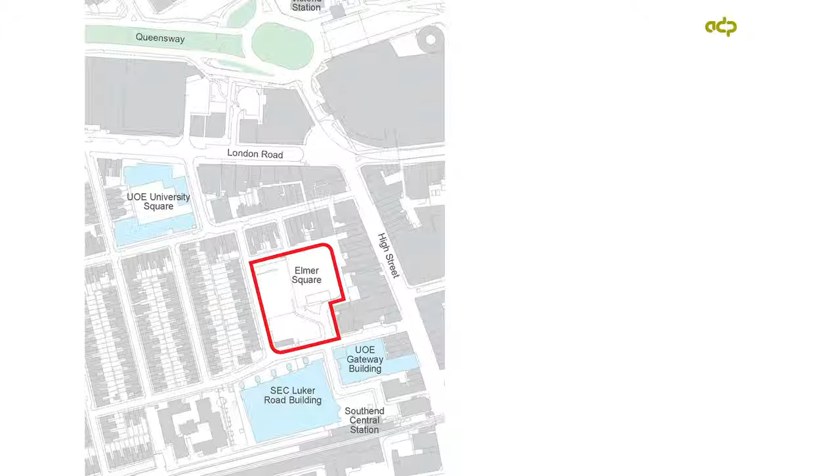So there's the site in a bit more detail. The Municipal Library is actually off the plan to the north, so that's roughly 5 or 10 minutes walk from the centre of Southend, so not ideal. The university, which is primarily located in Colchester, has accommodation with the Gateway building and also student study bedrooms, and the college has the Luker Road building, LSC funded big landmark building. So Elmer Square potentially is going to be the focal point of a new academic municipal area. Previously occupied by a multi-storey car park, which was pretty unsightly, so that was demolished to create the site.

So our involvement with the project began with an expression of interest through the OJEU notice procedure, and we were shortlisted with, I think, about 8 other architects to submit our more detailed design proposals and methodology. From the beginning, the way we've tackled the site is to try and put as much building to the western side of the site as possible, fronting onto Elmer Avenue, so that we're creating the sort of street scene and creating as much space as possible for public realm in front of the building. And to the right of the trees shown there, there's potential for future development which will further define that new urban space.

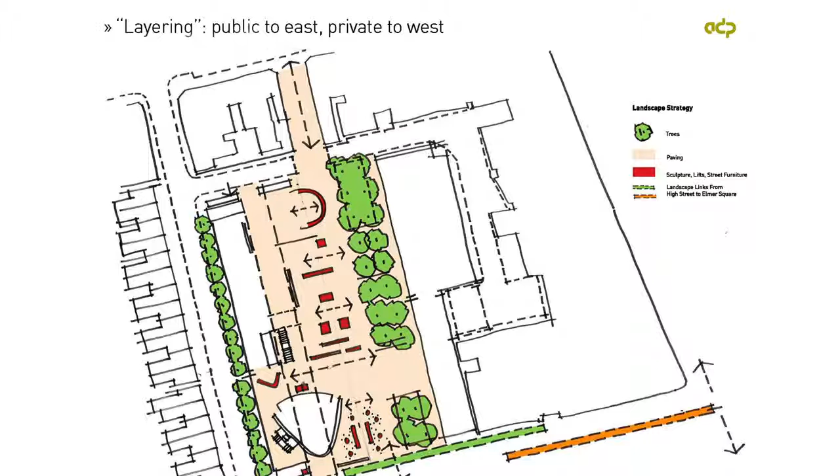And the way we approached the accommodation was to in effect layer the facilities so that the more private accommodation would be on the Elmer Avenue frontage facing towards the residential properties, and the more open facilities, where we want space to flow from inside to outside and people to feel they can come easily into the building, are on the eastern side of the building. In a way, we applied a similar sort of layering to the cross-section. So the ground floor has the more publicly accessible facilities. And then you move up to the first floor, which is where there's the shared library, and then moving up through the building, it becomes more and more private with the university and the college accommodation.

The college didn't want as much accommodation as the university, so we took advantage of that to pile as much accommodation onto the eastern side as possible. So we have a 4-storey building facing into the public square, the more sort of civic presence. And then on the other side, the western side, we used a 2-storey high vertical concrete fin at first and second floor levels to bring the scale down and relate it to the 2 storeys of the terraced housing opposite.

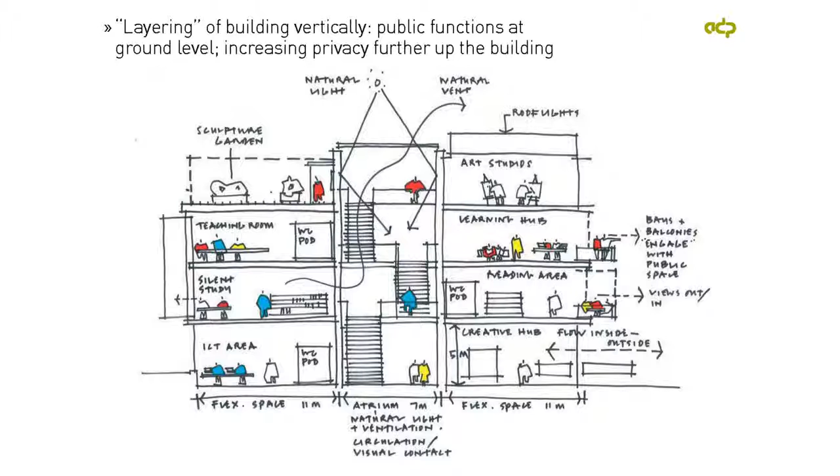Now I think with the fact that we have 3 different client users of the building, we can anticipate this building is going to change in the future. So in effect what we've done is to provide reasonably deep plan, about 10 or 11 metre deep floor plates, which are flexible and which can accommodate future change. Those will be naturally lit from the perimeter and also get secondary light from a light well which runs up the middle of the building.

That also contains the main staircase, which is quite a ceremonial grand staircase to take you up through the building to the different levels, because each level in effect is a mini entrance in itself. There's the entrance to the library at first floor, entrance to the university at second floor, and then the entrance to the college at third floor, all within the overall building.

So this was an early diagram which shows the different uses of the building. So the accommodation requirements included a 200-seat lecture theatre, which we put at the south end of the building in a sort of curvaceous form, that's shaded green.

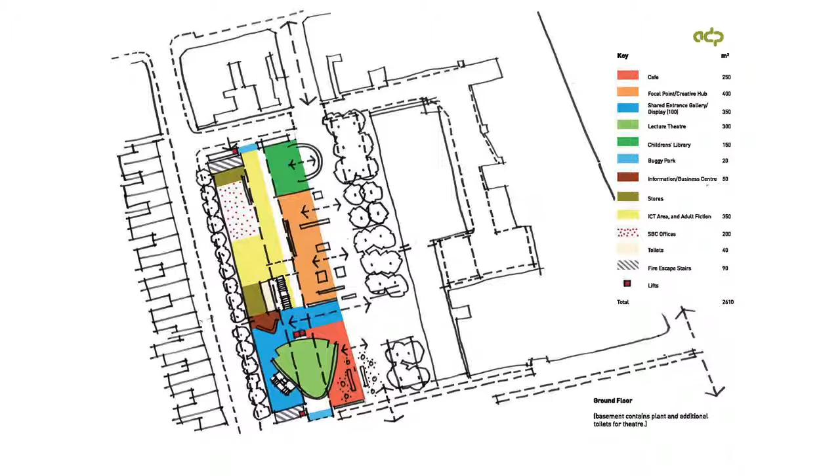And then between that and the public realm, shaded red, is a cafe, which is quite prominent in terms of its location, visible from the high street. Orange is the focal point gallery. Green is the children's library, and blue the entrance. So consistent with this idea of all those important public facilities being easy to get to from the public square. And then on the western side, as I mentioned earlier, the more offices and seminar rooms, slightly more introverted spaces.

Various cross-sections through the building. So at the top we have a cross-section which first of all makes that point that I mentioned earlier about the scale and that device of using the vertical fin at first and second floor levels, which relates, as the two arrows indicate, to the scale of the terraced housing on the left. And then on the right-hand side of that cross-section, the dotted arrow lines, they indicate the sort of transparency and openness that we're trying to create, including at first and second floor levels, where we're looking at having bay windows and balconies that push out from the building and engage with the public square.

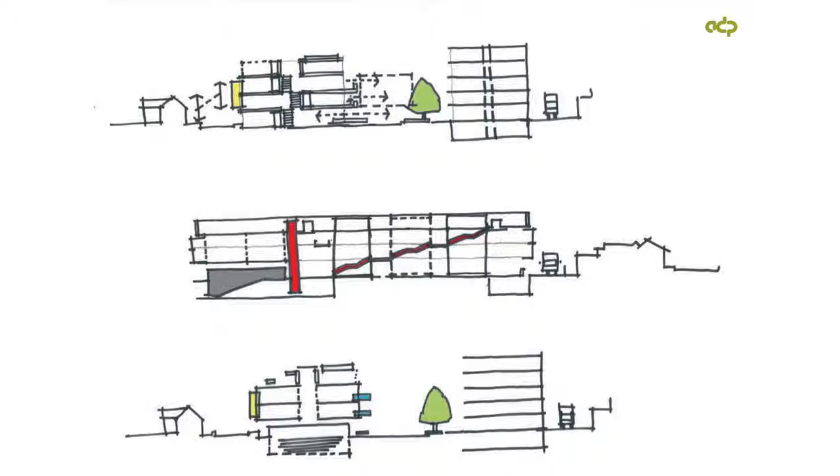And then we have a long section through the building which shows a grand staircase moving up through the atrium, and each of those flights relating to a shear wall which will be in situ concrete, so we're relating the structure to the circulation movement. And shaded grey, you can see the lecture theatre stepping into the site, so you'd enter it at the upper level and then step down into the lecture theatre. And that's shown also in the bottom drawing, which is a cross-section through the lecture theatre.

This is an early concept drawing, really exploring this issue of scale, because the building has to make this quite major transition from the scale of Elmer Avenue, 2-storey high, to a much more civic scale on the other side. And this is really examining whether the devices described would work and achieve what we wanted.

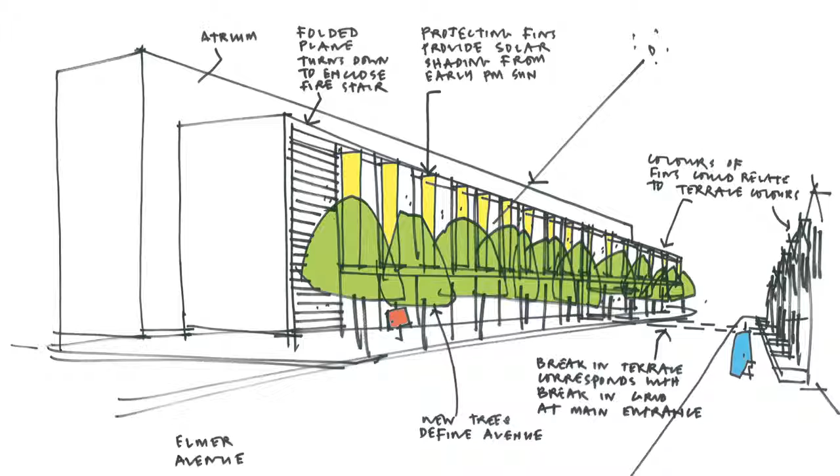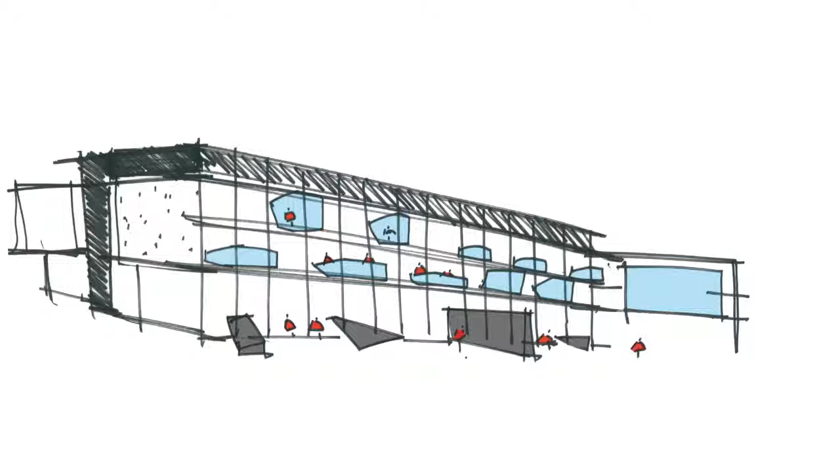And then this is one of the very first sketches of the public square side of the building. Ground level, the idea of these sort of shards which come out from the building and help divert the pedestrian flow into the building to help that openness. First and second floor levels, the idea of the bay windows, the balconies pushing out into the public square. On the right-hand side, you can also see the public screen for major events, which is a focal point of the square.

And then the top floor was seen as quite a heavy element, and that was partly inspired by looking at the pier, which is a very heavy upper element supported on some quite light structure below it, and that partly inspired this elevational treatment. It was also triggered by the fact that the college in these early stages was looking to put art studios on the top floor, and the thought there was that they would be top lit, naturally lit, with just very small windows in the facade.

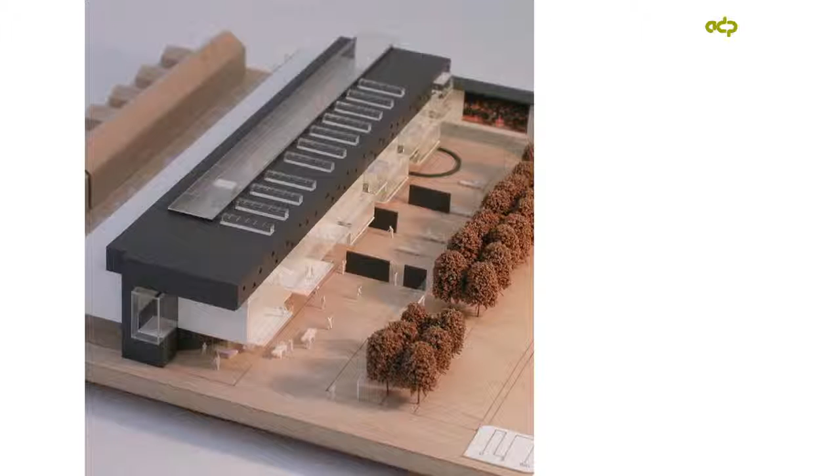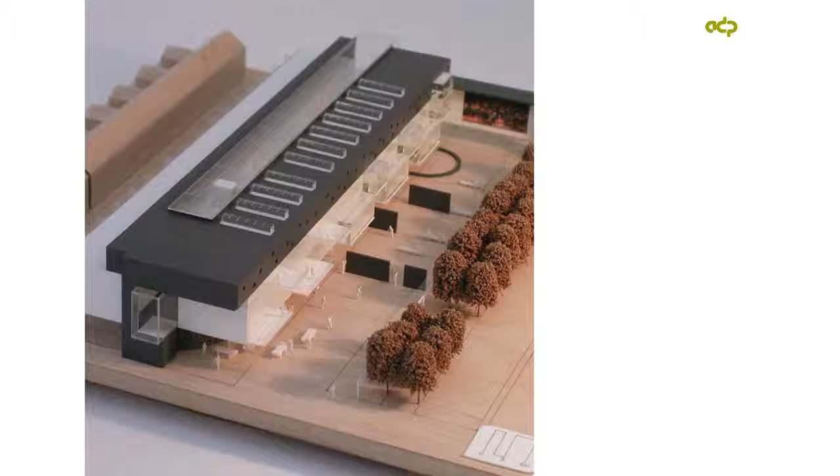And the principle also of this was about folded planes, which is a recurring theme in the composition of the building, which is shown also by the physical model which we submitted. You can see there the glazing to the central light well, the roof lights that I just mentioned to the top floor, and the various other features that I've mentioned.

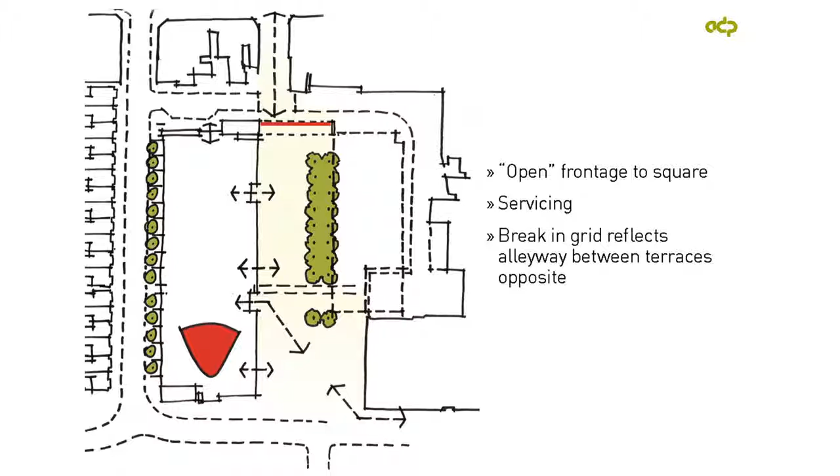So then we were fortunate enough to win the project, and as the scheme then developed through the more detailed design stage, really the principles of what we'd set out at the beginning continued as the design progressed. The openness to the square, the servicing was incorporated at the north end of the building, and on the left-hand side of that plan you can just see a very slight break in the terrace, which is where, as is common with Edwardian and Victorian terraces, you get a little narrow alleyway that allows you to come through to the back of the terrace. And we wanted to replicate that break in the grid in our building. So the vertical solar shading, which I mentioned.

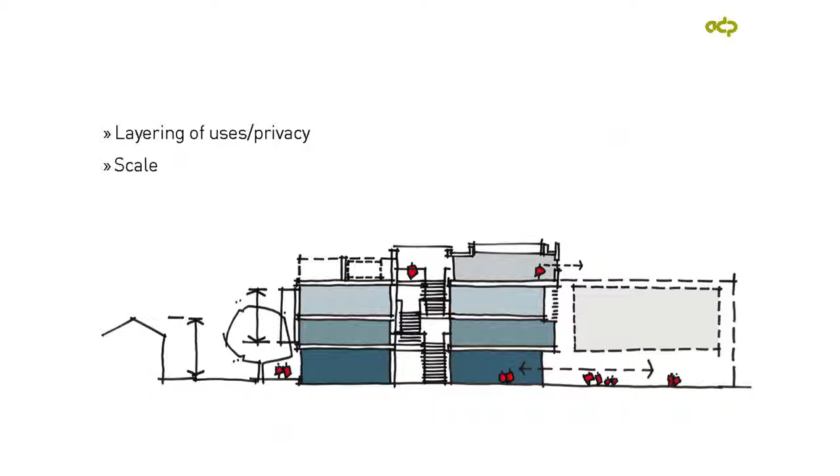Those fins relate to the fins of the terraced houses, and they also relate to that break in the geometry with a smaller grid corresponding with that passageway, and you'll see the impact of that in some of the photographs. But we thought it was quite an important way of relating the building to the urban grain.

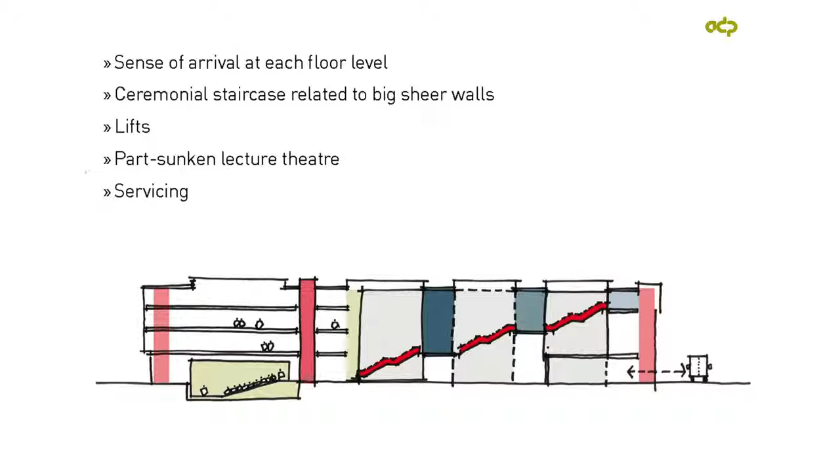And then a long section which reinforces the principles of these grand staircase flights leading up through the building, and the sense of arrival we are wanting to create at each floor level. And you can see also the way in which the lecture theatre is dug into the ground.

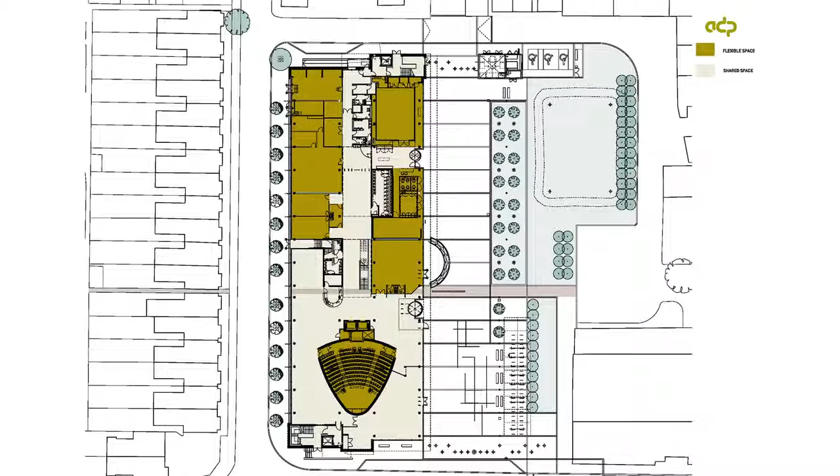And so the scheme developed with more detailed plans. You can see there the break in the grid coming through from that little passageway through the building and out on the eastern side. And centred on that is a fin wall, which is the main signposting to divert people into the main entrance.

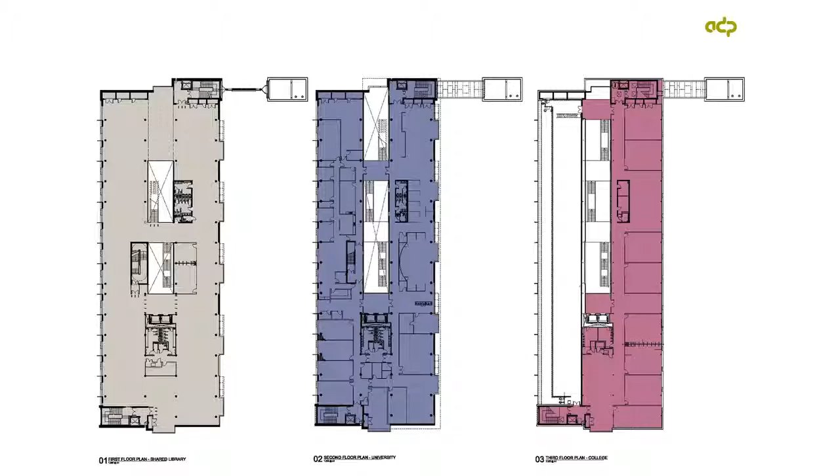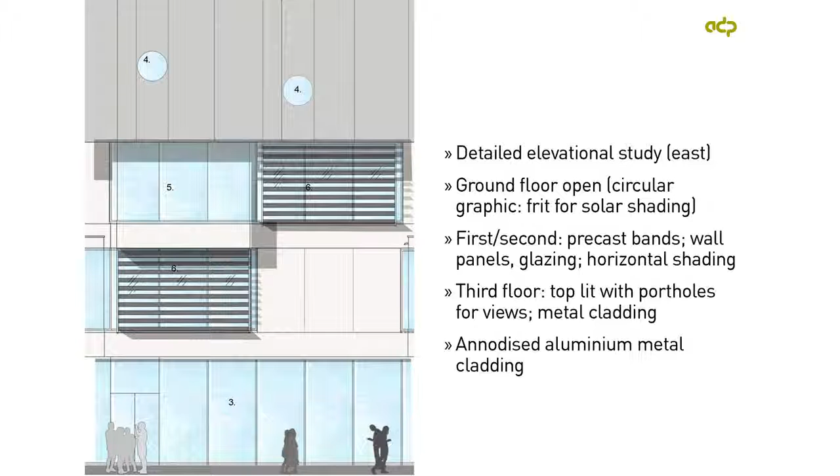And then on the third floor we have anodised aluminium metal cladding with porthole windows, which are really there just to provide a little glimpse of outside, a connection with the outside, with the main natural light coming in from above.

So there's a cross-section. The floor slabs are post-tensioned, and those slabs need to cantilever out for the bay windows. Those post-tensioned slabs were partly designed so that we would have column-free spaces, spanning the full 11 metres, to provide as much flexibility for the building in the future.

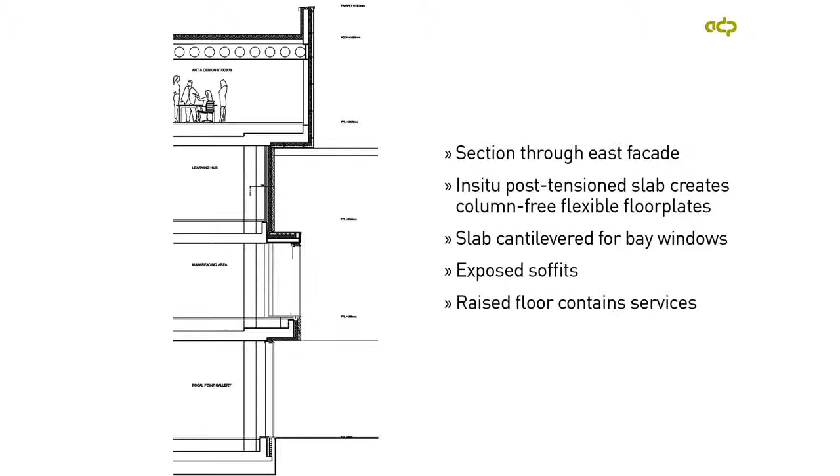And the soffits are exposed, so as heat builds up during the day, it can be absorbed by the concrete structure, as is very common in many buildings now. And the services are mostly distributed through a raised floor, and where they need to, they just pop down through the concrete structure to the floor below.

This is a plan of the west facade, where you can see the vertical fins that I was talking about, which are expressed really as folded planes of precast concrete, which fold out from the facade to form that vertical solar shading. Being precast, they obviously need to be fixed back to the in-situ slab, so that needed careful coordination.

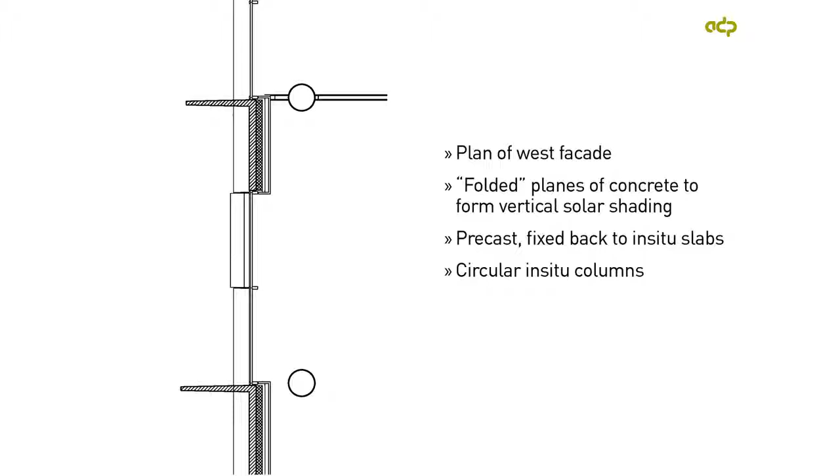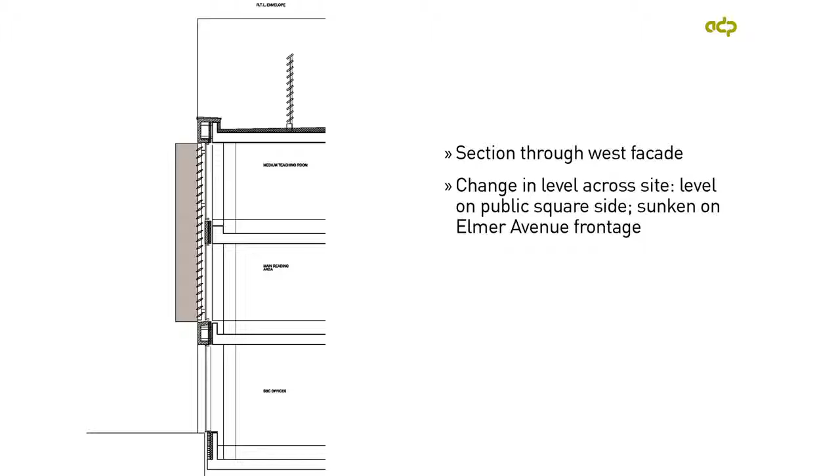And as you can see on the plan there, the columns are circular in-situ columns inboard from the perimeter of the building. There's a cross-section through the west facade, really making the points already made. But something just to note is that there was a slight fall across the site. So we had level entrance on the public square side, which meant we could sort of dig the building into the ground by about a metre on the Elmer Avenue frontage, which just helps to reduce the scale.

So then this is a detailed elevational study of the western elevation. You can see the projecting fins providing the shading, horizontal louvers then shading other windows. And we also introduced a frit for privacy, because there are a number of offices on this facade. It was felt appropriate and necessary to have some privacy by fritting the glazing.

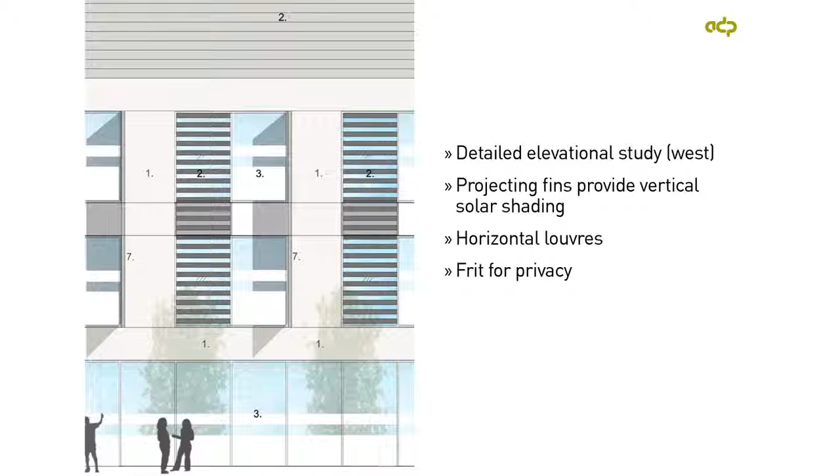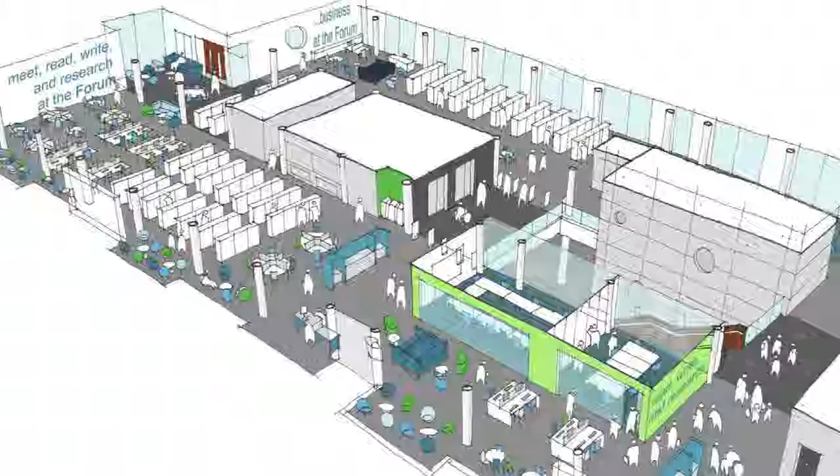So if we then move and look into the interior of the building, here we really wanted to use concrete and glass and neutral carpets as a backdrop to all the life and activity of the building. So we use coloured furniture and signage for wayfinding as the elements that bring the colour and interest to the building.

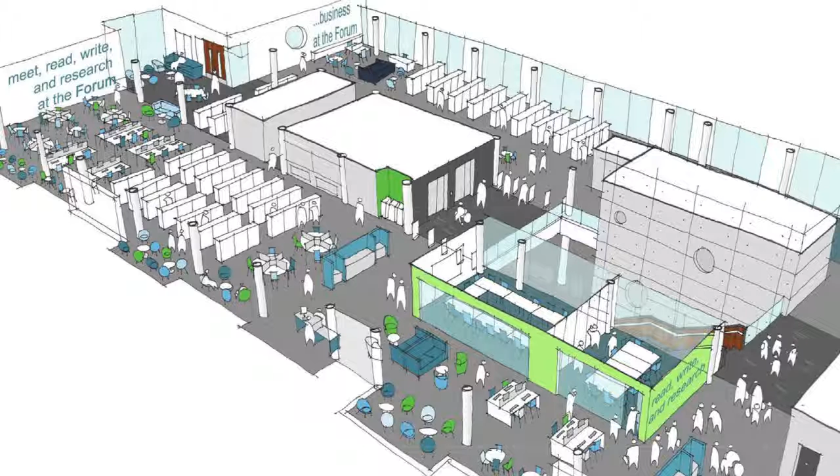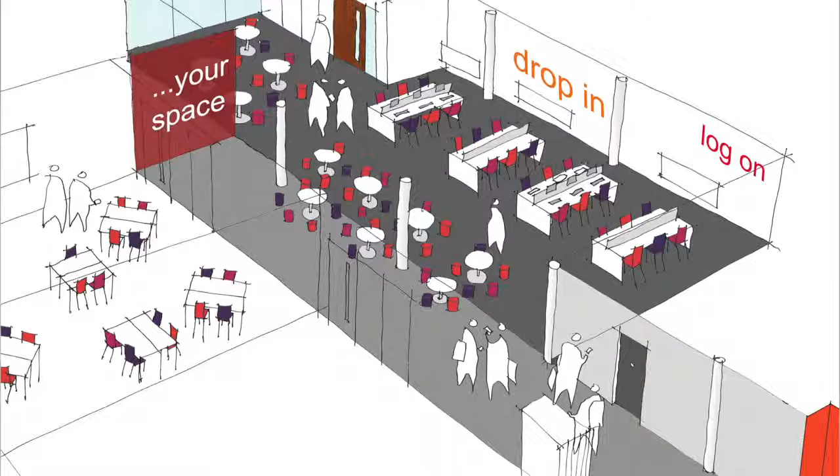One of the things we had to grapple with is the fact that we have potentially 3 different users and 3 different graphic styles and so on. So we managed to reconcile that so that the building reads as a single unified building, which we thought was very important. This is an early drawing of the second floor, the university's level, and then the third floor with the college. So slightly different identities, but within an overall language. And that's borne out by the photographs.

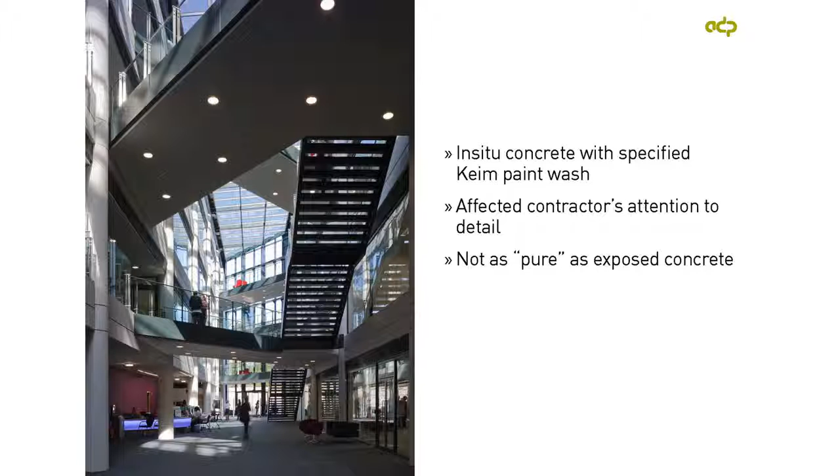I think one of the disadvantages of doing that is that inevitably the contractor is going to take the view that it's okay, it's all going to have an applied finish at a later date, and therefore they don't need to pay quite as much attention to the quality of finish and so on, which isn't ideal. And also, I think architecturally, if you're being very purist about it, why not just express the concrete for what it is rather than applying a finish to it? So whilst the university was absolutely happy, from an architectural purist point of view, we weren't quite so happy.

And so the next project that we did was the Jubilee building for the University of Sussex. And externally, this picks up on a number of Basil Spence's key themes, the use of bold panels of brickwork. We applied flaps and fins to the elevation to control natural light, including coming in from above. But there wasn't much exposed concrete externally. There's a big slab over the entrance, and there are some retaining walls in the external landscape and paving.

But most of the concrete was internal, much of it in situ, and certainly by the end of the job, the contractor had achieved a very good standard. The problem that we had was that some of the very first panels they cast were the most prominent ones right opposite the main entrance, and obviously that's a problem. And I think what it highlighted is the need for sample panels.

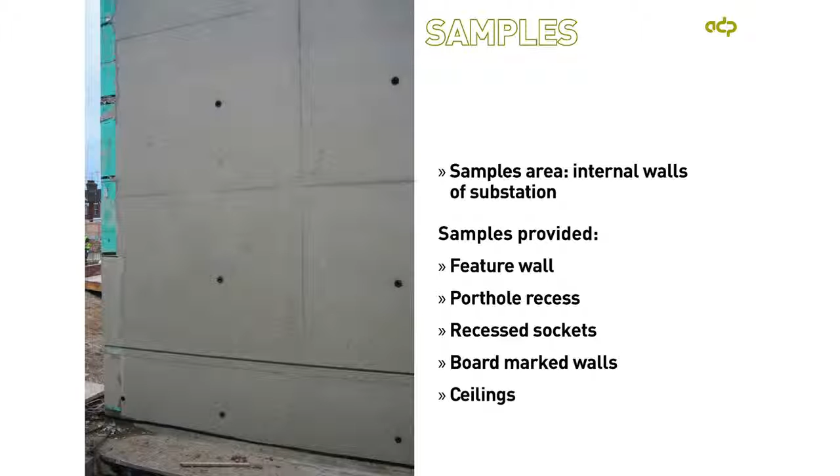So what we built into the contract was a requirement for samples to be provided in the interior of the electrical substation. So pieces of the feature walls, porthole recesses, sample recess sockets, board mark walls, etc., are all incorporated into the substation. I would think that in 50 years' time or something, someone's going to come along and want to demolish this substation, and they're going to look in there and think, well, what's all this special concrete about? It's only a substation.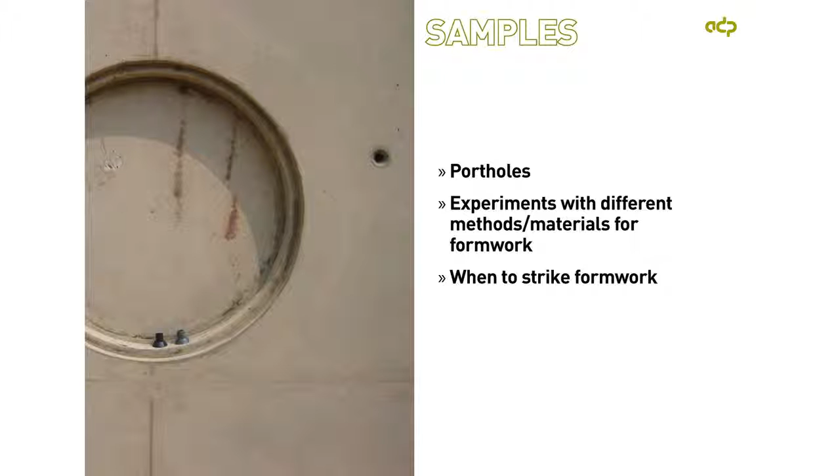But that's the reason why it was there, and some valuable lessons were learned by providing these samples. So, for example, the recess portholes, the contractor experimented with different ways of using different formwork, different materials for the formwork, and precisely when to strike the formwork, just to get that absolutely right before they were, if you like, let loose on the final building.

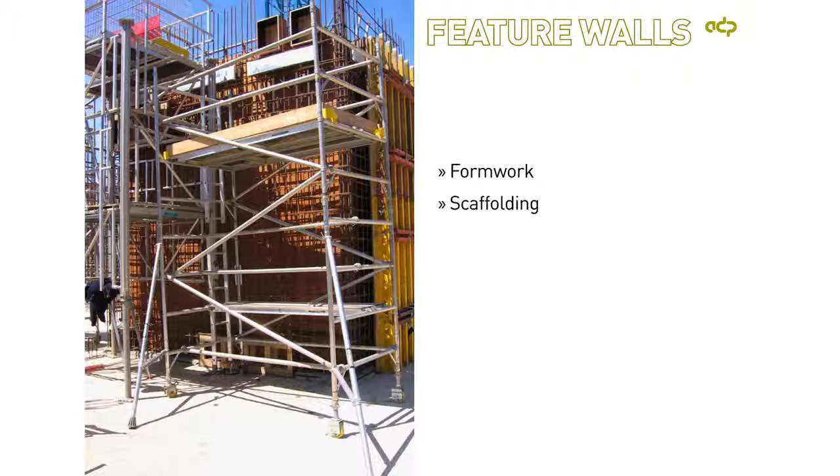Another point to make: this photograph just makes the point that, as architects, engineers, sometimes we draw just two lines to show a piece of in situ concrete work. It's all the paraphernalia that goes with that to achieve that in terms of formwork, scaffolding, reinforcement, safe access to apply the concrete and so on. So it's all the things that go with it.

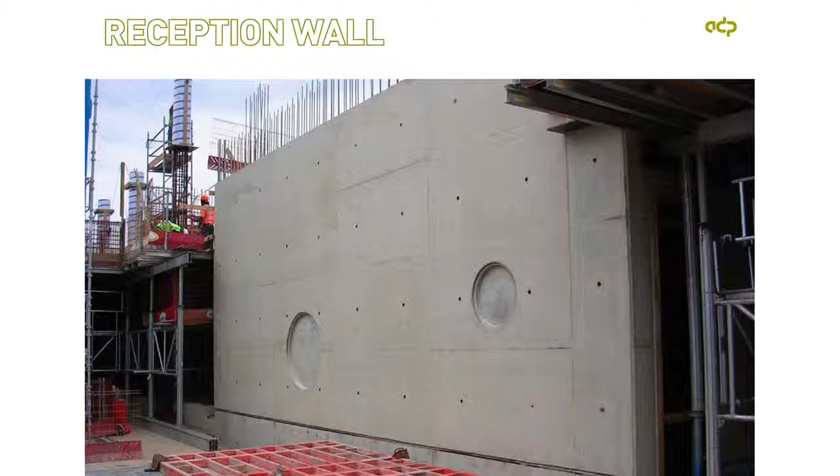This is the reception wall, which was to a very good standard. But sometimes, just after concrete's been cast, it might be a wet, cold day in November, it's raining, the concrete hasn't fully dried out, and it might not look too good, and sometimes you just have to stick to your guns and be confident that it's all going to be fine.

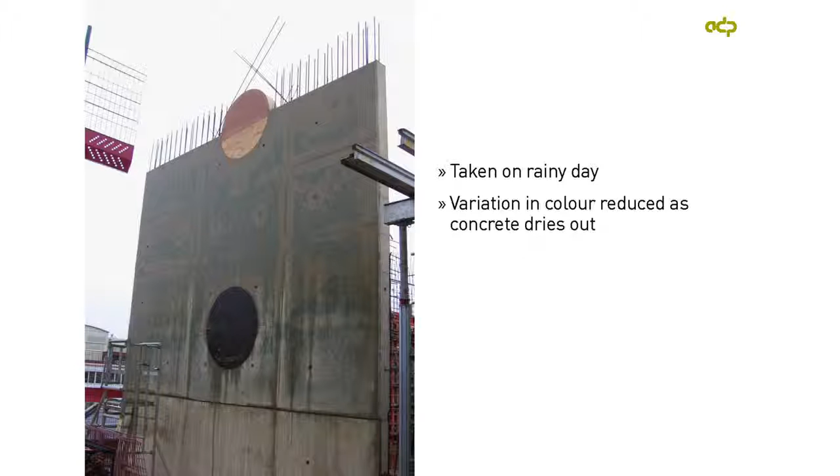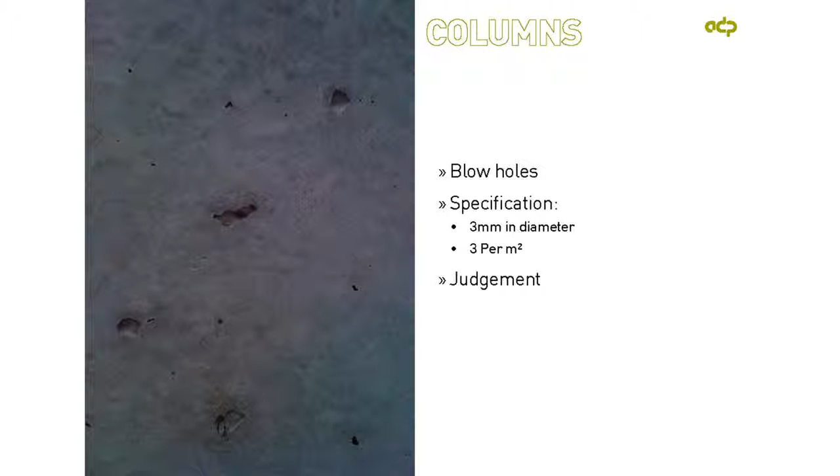Because when the concrete does dry out, variations become less apparent. We had an issue with the columns, particularly with blowholes, and on something like this you can be quite mathematical and precise about it in terms of the specification: the maximum diameter of blowholes, how many blowholes per square metre you're going to allow. But there also needs to be a bit of qualitative judgment about it, because you don't want to make every bit of concrete perfect, because it won't look like concrete. Concrete does do this sort of thing, and it's part of its character. So you have to judge what you are going to make good and what you're going to leave as it is.

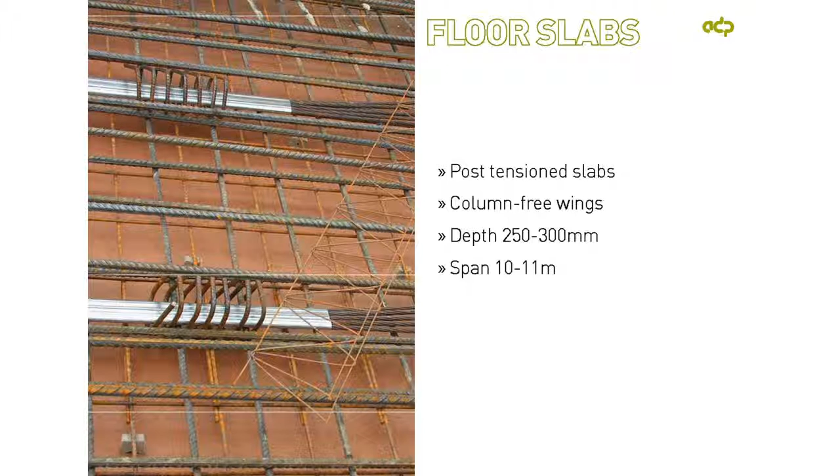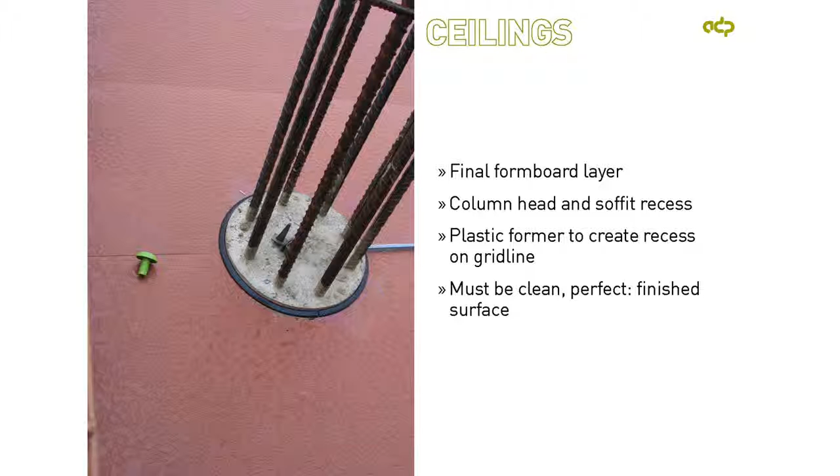Just a photograph of the floor slabs, post-tensioned, as I mentioned, and that enabled these wings to be flexible and column-free. The concrete for that was about 250, 300 millimetres deep, and that provides the span that we needed. And then the soffit of the floor slabs obviously forms the finished ceiling, and this is a photograph of the final formboard layer. You can see around the top of the column, wrapped around the column, there's a plastic detail which forms a little recess, and also going off to the right of that, a plastic former which creates a recess on the grid line. So those are little quirks, little details incorporated.

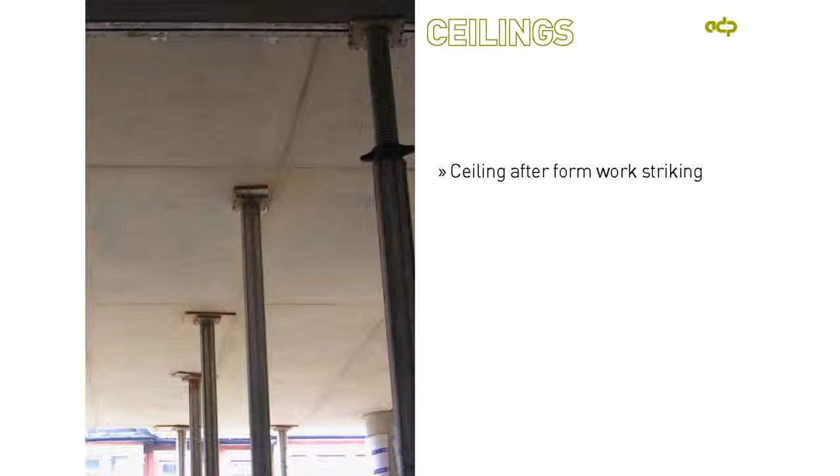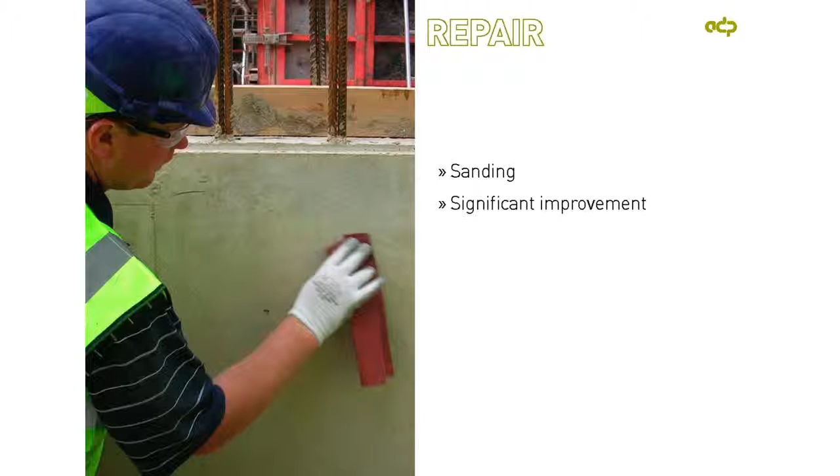Something else to look at very carefully: if you've got anchor bolts, these are anchor bolts to the lecture theatre walls, you need to be precise about where you want them. So we were precise about wanting them to be in the middle of the vertical board marking. It would look very odd without that, but you have got to tell the contractor that's what you want. And we were quite interested that sanding the concrete down, where there were one or two areas which needed that, did actually lead to quite significant improvement in the finish.

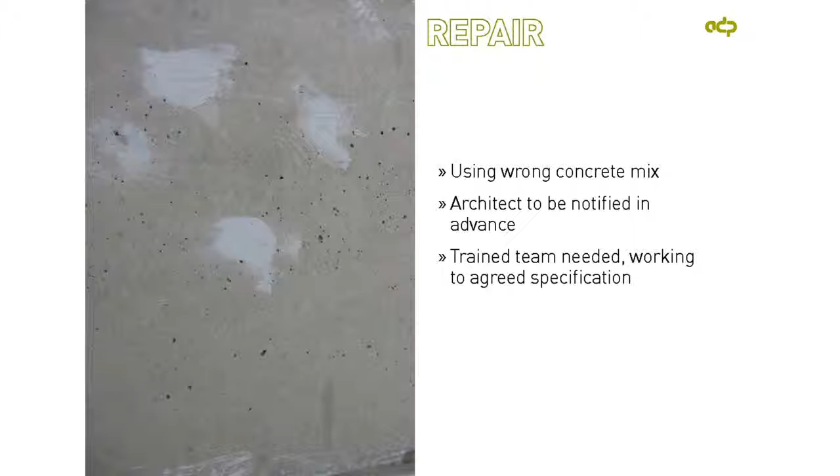If you do need to do repairs, it's vital that it's done to an agreed specification. You need to have an agreed written specification of how these are going to be tackled, and that the architect is notified in advance. Otherwise you can end up with some unsightly, ill-considered repairs, and then you've got even more of a problem. A photograph here which shows the precast panels on the western side as those were being assembled and fixed back into the floor slabs.

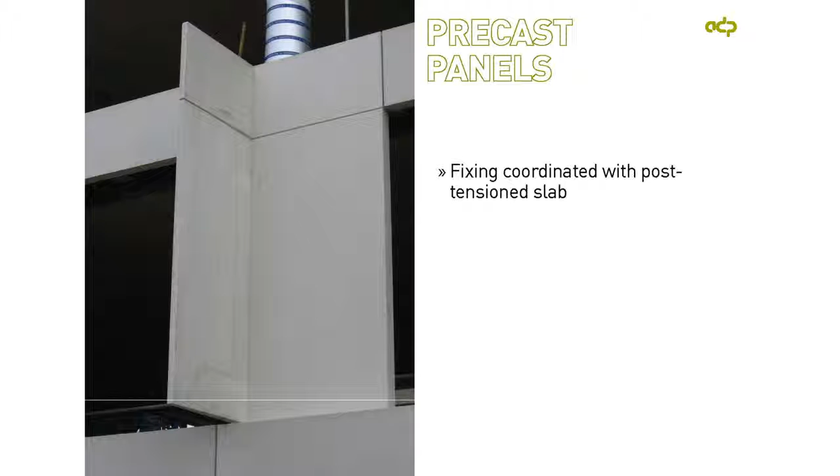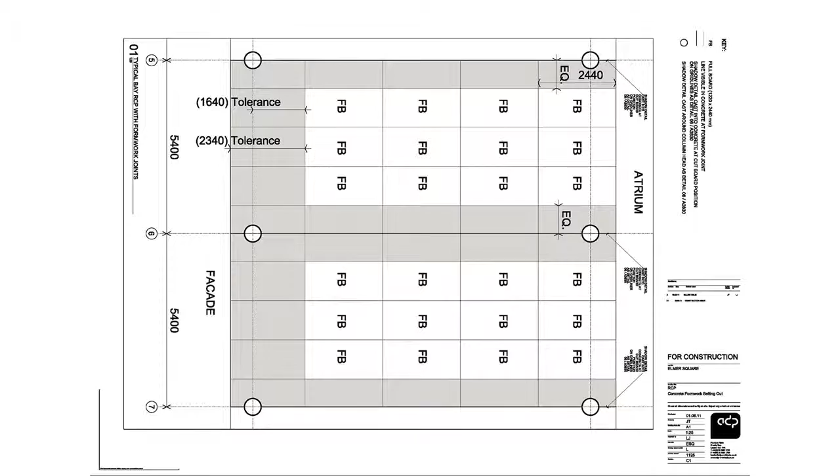And then one or two drawings. Here's in effect a reflected ceiling plan which indicates exactly where we wanted the boards to be positioned. So we were quite relaxed about this in one direction. We didn't want every single joint to line up with grid lines. So running across the drawing, we were relaxed about that. But going the other way, you can see the two equal indications to make sure that they're equalised across the bay. But obviously, whatever you decide, you need to be explicit at tender stage, because it makes a big difference to the price and the methodology.

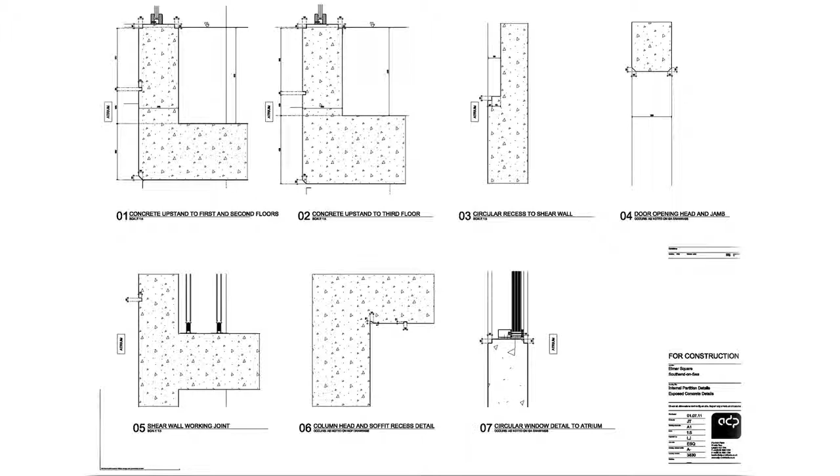And similarly for things like the portholes, you've got to position everything you want very precisely on the elevational drawings. And similarly, if you want recesses or chamfers, you need to indicate all that on your detailed drawings. So I've talked about the precedent projects, the way in which Canterbury and Sussex, and one or two lessons learned there, led to our approach to the Forum.

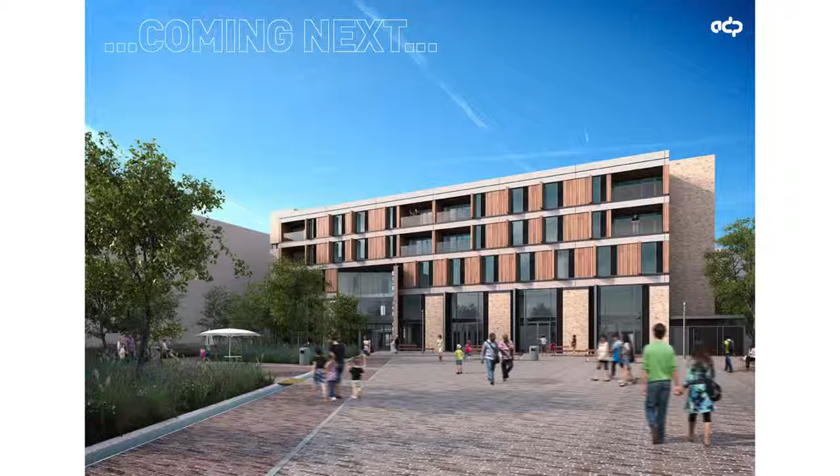And then just to finish with one or two images of the Forum: the main facade, that favourite view of the entrance, and then one or two nighttime shots to finish off with.